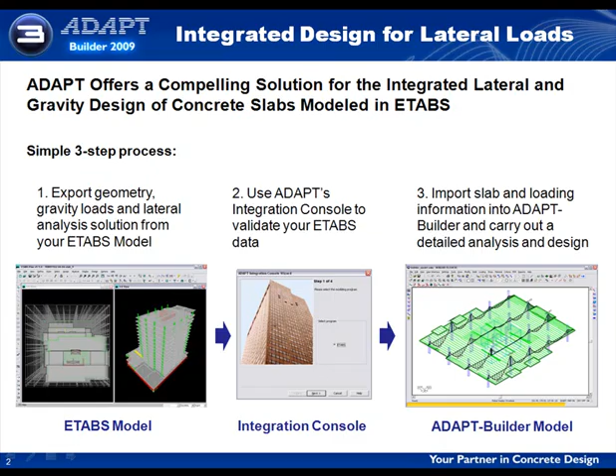We will start by exporting our geometry, gravity, and lateral loads from the ETABS model. This will be done in two steps, once for the geometry and gravity loads, and then for the lateral loads. We will use the print tables function of ETABS in order to export the necessary information. The input table carries all the geometry and gravity information.

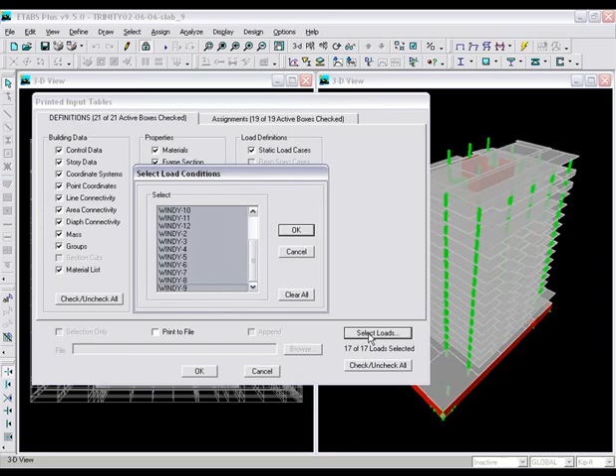The printed input tables window gives us the option to select which components we want to export. In our case, we will select all. We also have the option to specify which loads are exported. We will only select a few. The information will then be printed to a file, which will be used later for the import.

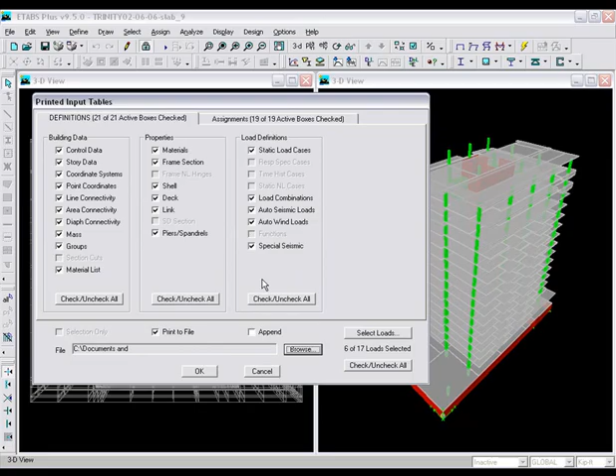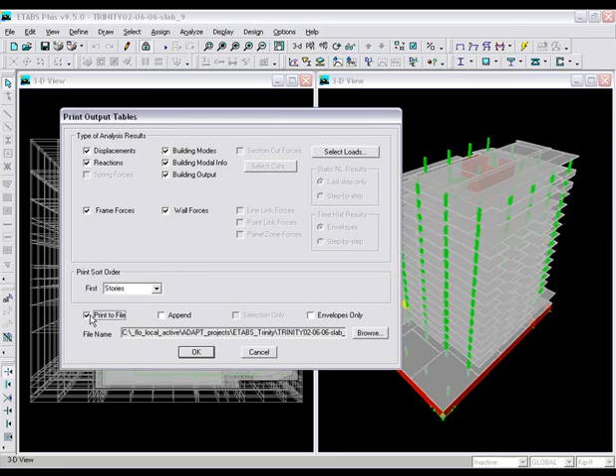Now that the geometry and gravity information has been written to a file, we can export the lateral loads needed for the design using the print tables function. In this case, we will select the analysis output, which holds the solution of the model. We are prompted to select which type of analysis results to export. We will select all the options. The loads and load combinations to export will also be selected.

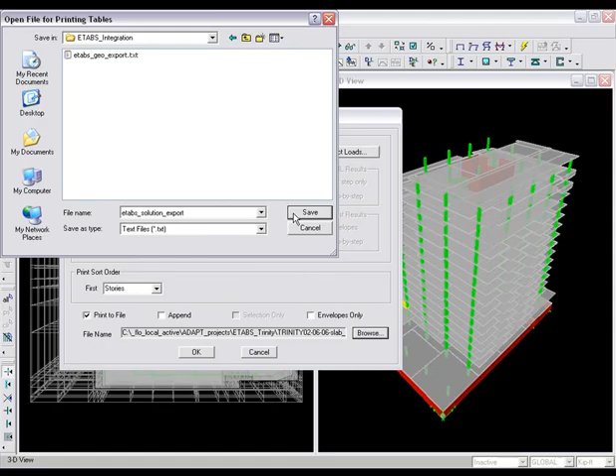We will then write the information to a file. All the necessary information has been gathered. We can now close out of ETABS.

Prior to importing into ADAPT Builder, we will need to validate the ETABS data using ADAPT's integration console. The console was kept as a separate tool, allowing individuals who do not have an ETABS license to benefit from the integration. The option is given to import the geometry, gravity loads, and lateral loads, either individually or in combination. Depending on the import option selected, the integration console will require the location of the files created in ETABS previously.

We have the option to select which levels to import. In our case, let's go ahead and select the entire structure. A location needs to be defined for the output file.

Once next is selected, an equilibrium check is performed. A summary is reported indicating the status of the check for each of the levels imported. The results for a given level can be seen in greater detail.

We select Finish to exit out of the integration console and launch ADAPT Builder 2009. We have selected 3D Finite Element as our floor system, RC Only as our design scope, and Dynamic Rebar Design for our extension modules. Ensure ETABS is selected and select OK to open Builder.

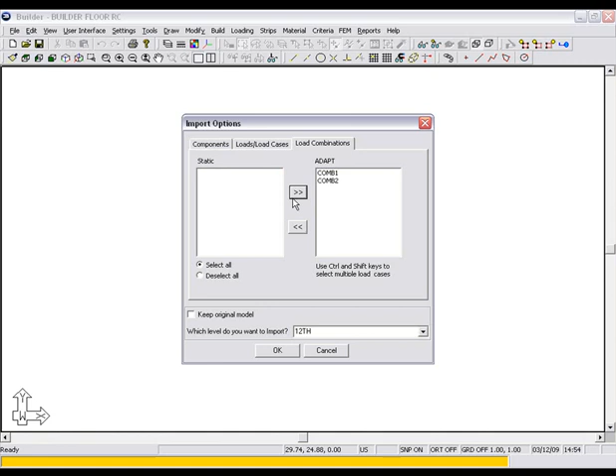Under Loads, Load Cases, we will go ahead and select All. Next, we will select both of the load combinations available and select OK. At the completion of import, a lateral load status check window will appear showing the results of the various checks Builder has run for each of the load cases, such as equilibrium and compatibility.

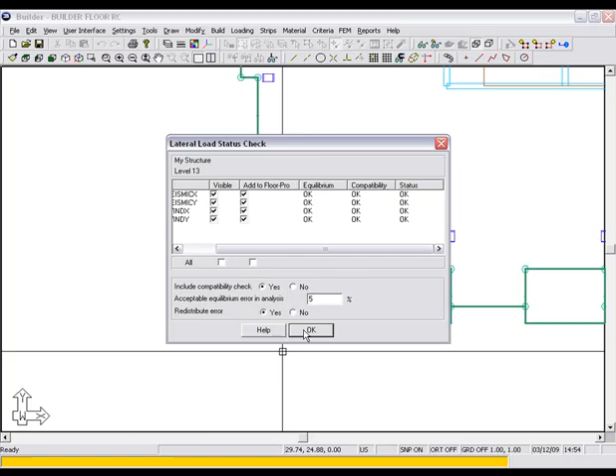In the case where the solution is slightly out of equilibrium, we have incorporated the redistribute error function, which will distribute the error and bring the load case to equilibrium. The floor has been successfully imported. Let's go to the perspective view to get a closer look.

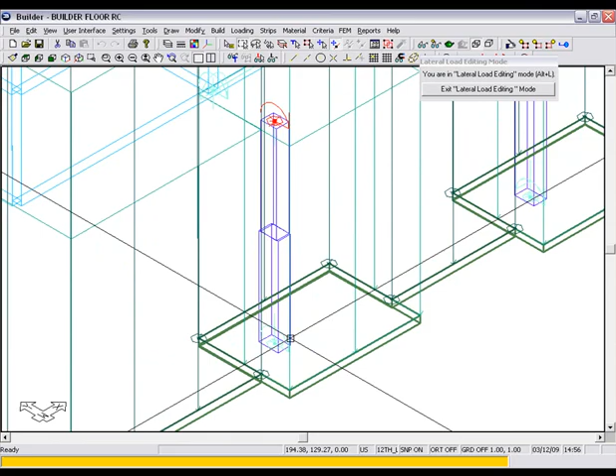As we zoom in, you can see the model in closer detail, and the force actions which were all brought in from ETABS. Let's go ahead and open this moment at the top of the column and view its details. The load case is lateral seismic X, with the magnitudes as shown. We can also go ahead and open the moment at the opposite end of the column.

If we change our view to front view, you can see the force actions which are applied at the top and bottom of the columns and walls. Essentially, we took a slice out of our ETABS model.

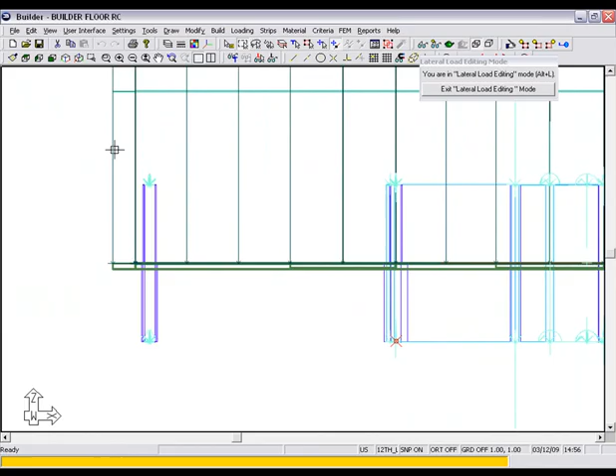If we select this load, it is a gravity load and part of the load case dead, and is a patch load with a magnitude of 25 pounds per square foot.

At this point, we will go ahead and make one minor modification to our load combinations. We will go to Loading, Load Combination. You can see we have two default load combinations, Service and Strength, and the two which were imported in from ETABS, COMB1 and COMB2. We will go ahead and swap the dead and live load cases for the service and strength load combinations to the dead and live load cases which were brought in from ETABS.

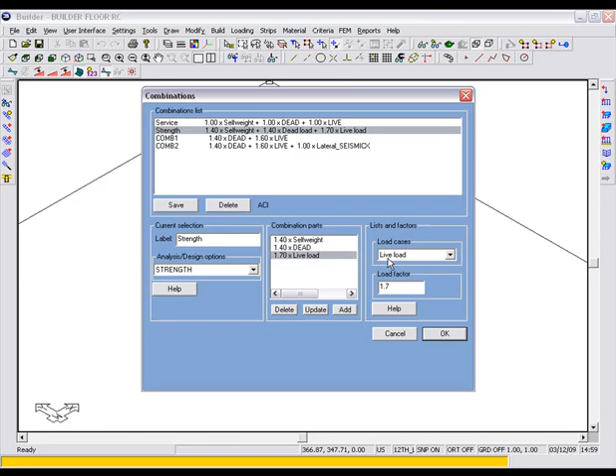Let's also go ahead and set the two load combinations which were brought in from ETABS to an analysis design option of strength. Once we have completed our modifications, we select OK.

We will also go into the Criteria menu and turn off the option to automatically generate column strip, middle strip for this video.

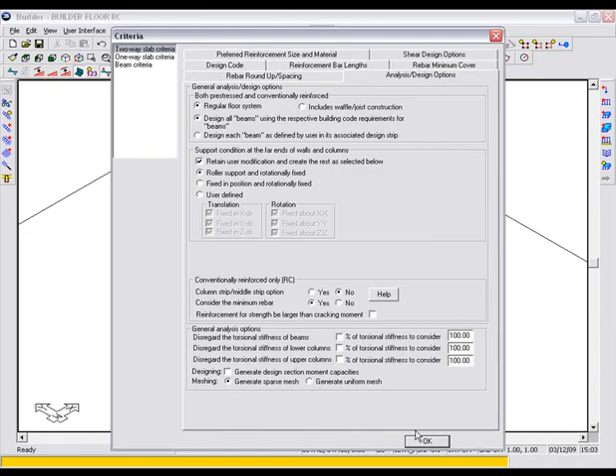Adapt Builder is based on the latest finite element technology, whereby an adaptive organic mesh generator automatically detects the intricacies of a floor system and provides well-balanced and consistent quadrilateral finite element cells for an accurate and reliable outcome. We can now analyze the model.

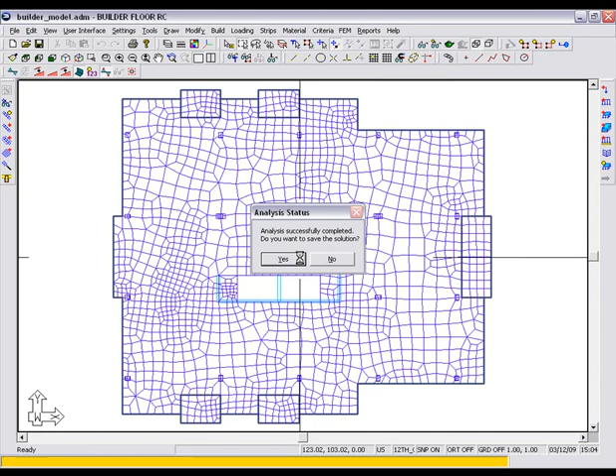We also have the ability to calculate the rebar requirement at any specific location within the slab by creating a manual design section. This allows us to see as far as rebar goes what is required.

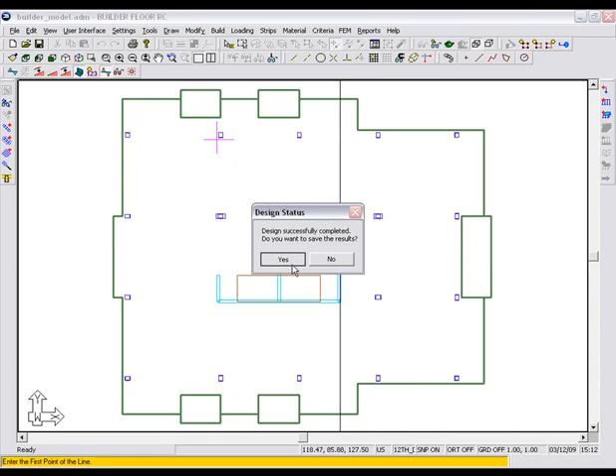Once design is complete, we can double-click on a design section and view the results. Let's review the rebar required for all the load combinations.

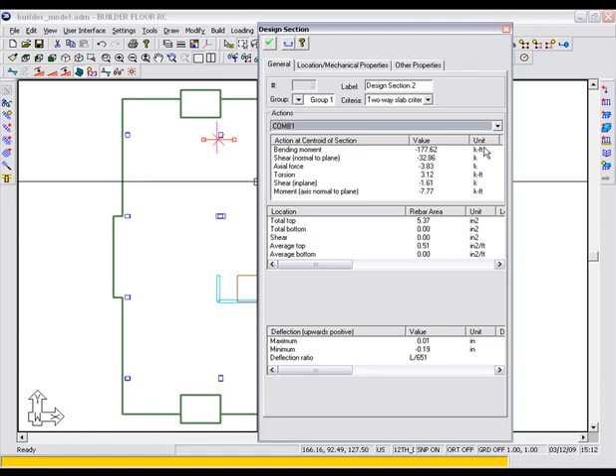The manual design sections are also great for quick checks and details, but for a more efficient design for the entire floor system, you're better off creating support lines.

We start by creating the support lines in the X direction, and then conclude by defining the support lines in the Y direction. In essence, we are defining the load path for the X and Y directions.

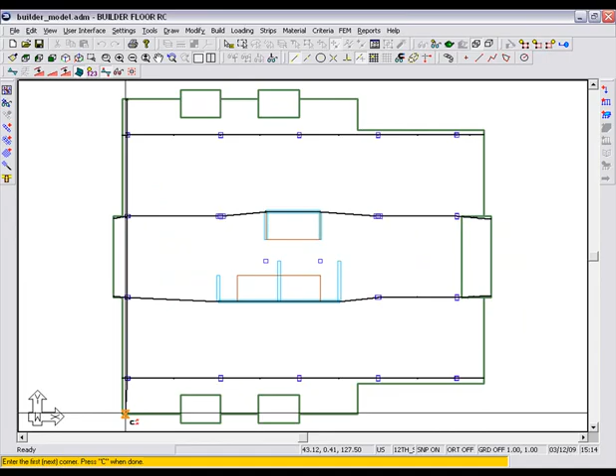At the completion of the support lines, we need to then go to the FEM menu and generate the design sections.

We can now see the tributary regions which were automatically created using the support lines as a guide. Each support line now has design sections which are associated to it.

The frequency of the design sections can be defined by you. Let's quickly review all the strips to ensure they are what we had intended.

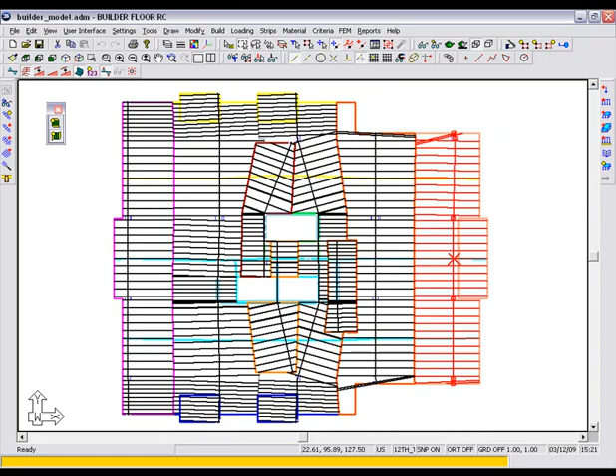Everything looks fine, so we can now go ahead and design the design sections.

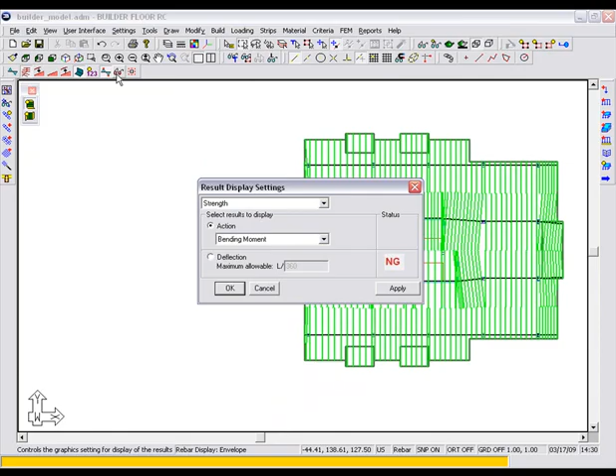At the completion of the design, we will use the Result Display Settings tool to briefly review the outcome of our design. We will look at the total design moment for several load combinations.

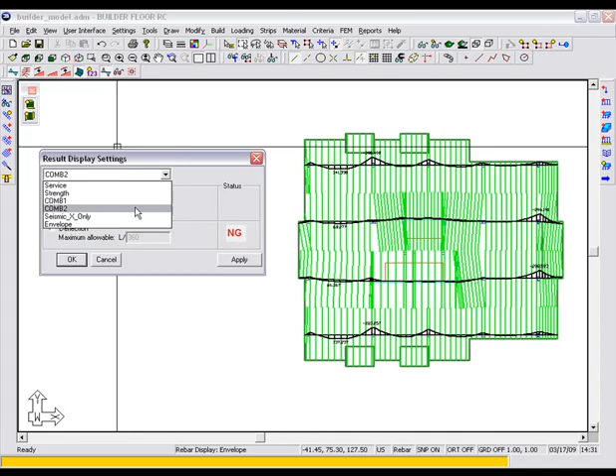The seismic X-only combination will show us the effect of the seismic force on the slab. In toggling between the X and Y direction, we can noticeably see that the X direction is the primary.

The deflections for the various load cases can also be graphically shown in this view.

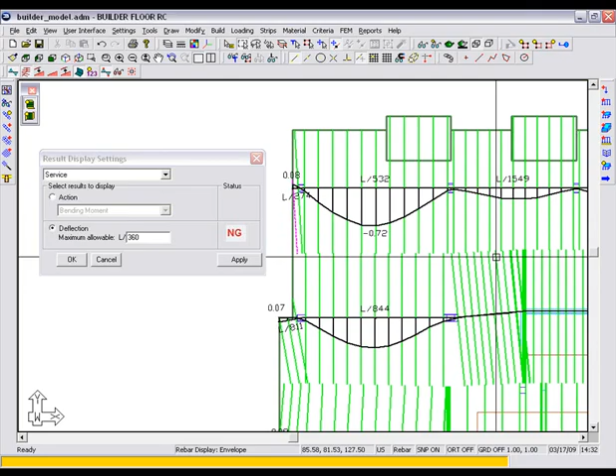We will go ahead and generate the rebar now. Keeping all the default settings, select OK.

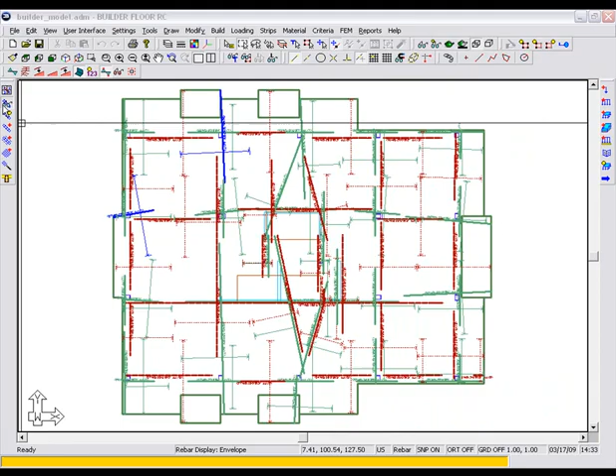This is our reinforcement drawing. Let's go ahead and clean up our view by focusing in on the top bars only in the X direction. Now let's zoom into a column to have a look in greater detail.

We can clean and modify the rebar as we wish, utilizing the flexibility the Dynamic Rebar Design module offers. Notice how the spacing changes automatically due to the change we made.

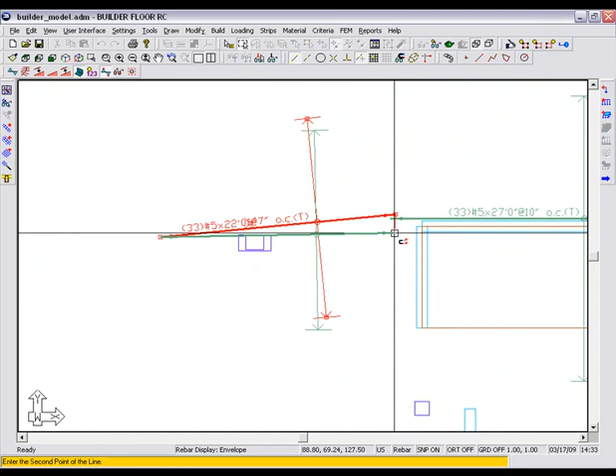As we edit the properties of the bar by changing the spacing and length, notice how the changes are automatically recalculated and updated.

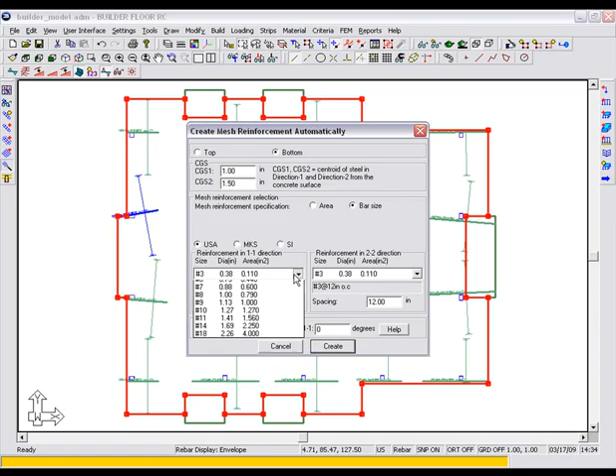We will now substitute some of the bars calculated with the typical base reinforcement mesh, which will reduce the total calculated bars. Let's add a top and bottom mesh of number 4s at 18 inches on center.

We will then redesign and generate the rebar drawing. In this case, Builder will take into consideration the mesh created, therefore resulting in less overall reinforcement.

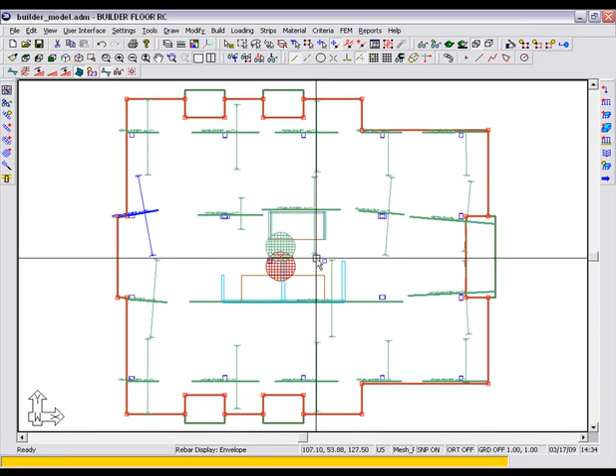This time around, we will keep envelope as our load combination, select library lengths as our bar lengths, and select aligned orthogonal as our bar orientation.

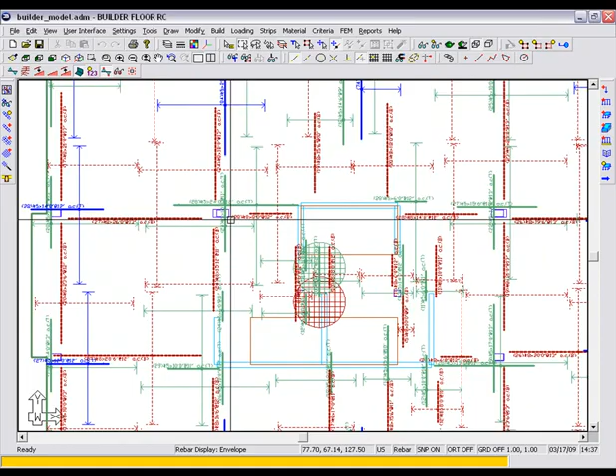Looking at our newly generated rebar drawing, you can see the amount by which it has been reduced due to the addition of our typical base rebar. We now need 28 number 5s where we previously needed 33.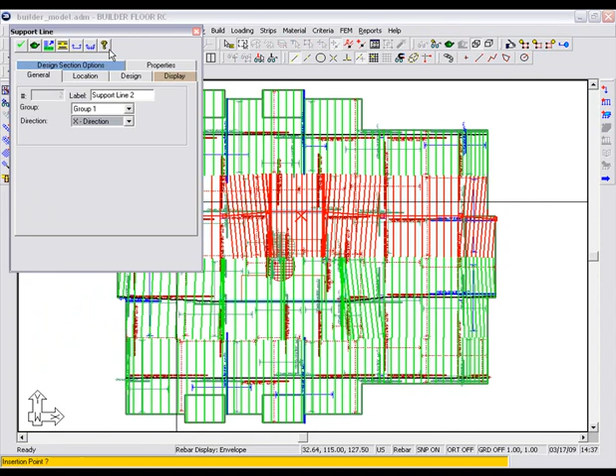If we go back to our design strips and select one, we will be able to see the rebar generated in elevation. Let's zoom in to get a closer look.

The demo has ended, and we will now conclude this video by reviewing the key advantages of using AdaptFloor Pro to design concrete slabs modeled in ETABS.

The first key advantage is that the integration console recognizes and extracts applicable loads. The integration console also automatically performs an equilibrium check on the extracted loads. If the equilibrium check passes, we continue in our design process.

However, if needed, there's an algorithm that can redistribute the errors from the ETABS model.

Once the geometry and lateral loads are verified and imported into AdaptFloor Pro, it creates the industry's most accurate 3D FEM model of the slab system and properly combines the gravity and lateral load cases, resulting in a more reliable solution for required rebar and its distribution.

This is particularly true at slab discontinuities.